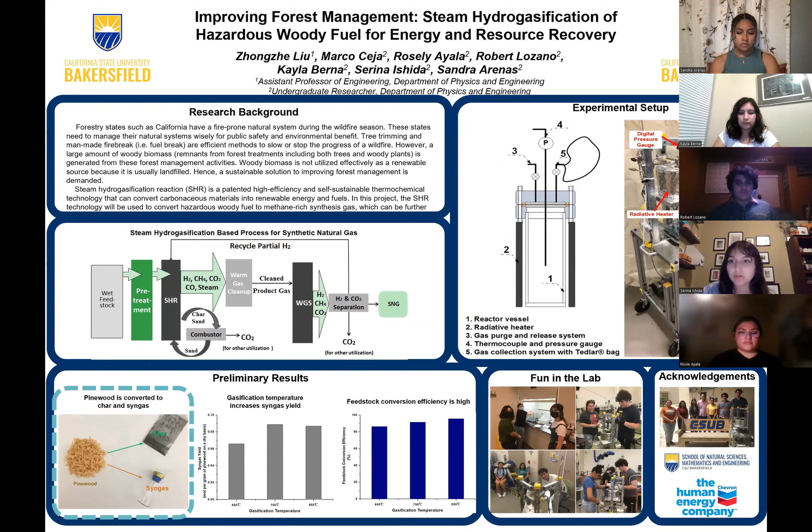For our outline, we have Kayla discussing project background. We have Robert talking about our proposed approach, Marco talking about research objectives and methodology, Sandra discussing results, and Rosie discussing summary.

So for a bit of background, forestry states such as California have a fire-prone natural system during the wildfire season. These states need to manage their natural systems wisely for public safety and environmental benefits. So, for example, according to ca.gov, in 2020, there was a total of a little over 8,000 wildfires just in California, burning about 1.4 million acres. And this mostly is due to climate change being an issue.

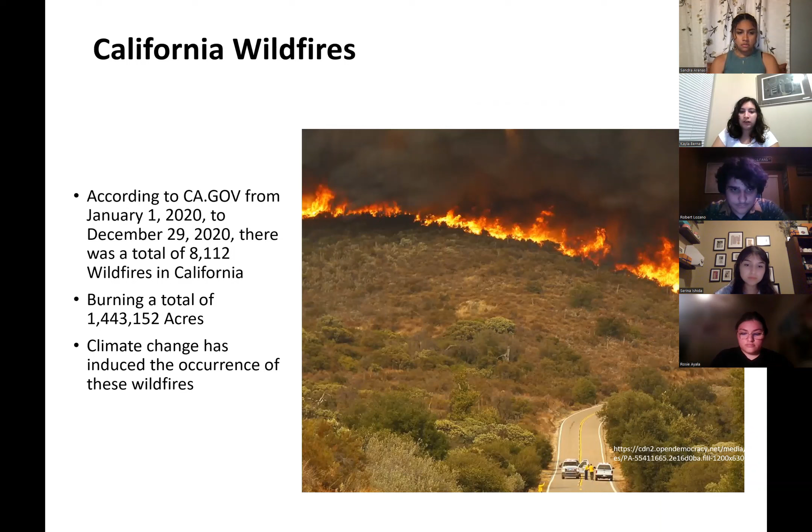A way to manage this is tree trimming and man-made fire breaks, or fire fuel breaks. They are efficient methods to slow or stop the progress of wildfire. Next one, please.

All right. And with the management of the forests and everything, it creates woody biomass. And forest biomass is extremely fire hazardous, and it is generated from forest activities and everything. Woody biomass is not utilized effectively as a renewable source because it's usually in landfills. Hence, this project as a sustainable solution to improving forest management is demanded.

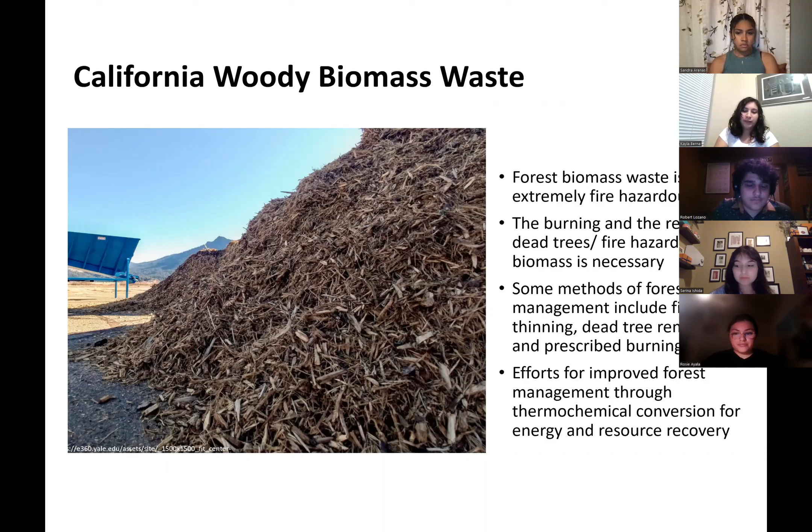Okay, so next will be our proposed approach. Steam hydrogasification reaction, or SHR, is a patented high-efficiency and self-sustainable thermochemical technology that can convert carbonaceous materials into renewable energy and fuels. The SHR process does not need external hydrogen and water supply except for the startup.

So if we look at our diagram, starting with the wet feedstock, which is where we get the leftover biomass from the fires, like all of the wood, it's wet because it's out in nature. We have to pre-treat it, which means we have to dry it out so that we can control the molecular ratios that go into our SHR, our steam hydrogasification reaction.

The Department of Energy's National Energy Technology Laboratory has performed an in-depth techno-economic analysis of the SHR process and confirmed that the SHR process has the potential for 12% higher efficiency at an 18% lower capital cost compared to other state-of-the-art gasification technologies.

So as you can see from the SHR box, the products that we get from the reaction are hydrogen, methane, carbon dioxide, carbon monoxide, and steam, or water. So after we get those product gases, a process called WGS, or water gas shift reaction, occurs, which is where the carbon monoxide and steam react together to create hydrogen and carbon dioxide, which can be separated,

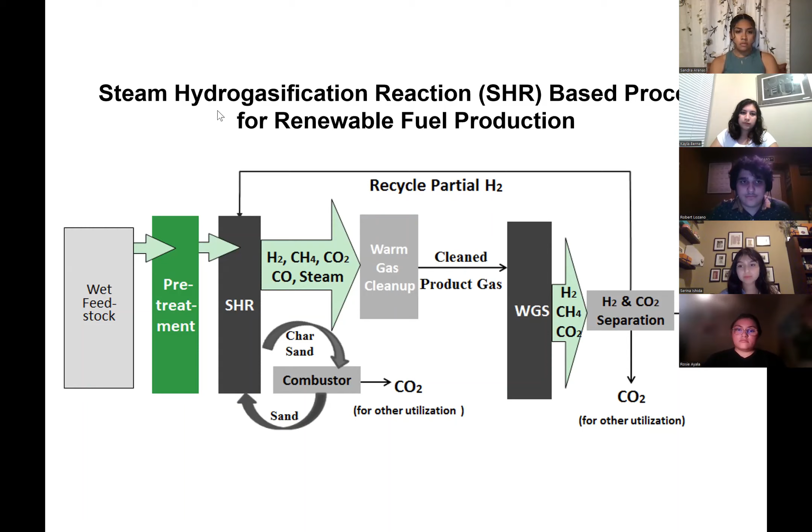All right, this next section is research objectives and methodology. So these are the three major research objectives. The first one would be to determine the syngas yield and the char yield. We don't always get the amount of gas and char we put in, so we want to make sure we know how much we are getting back.

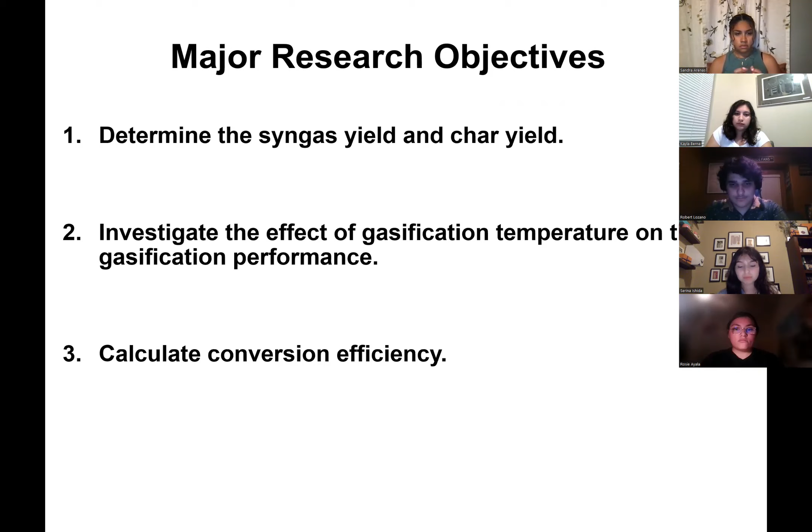Then we will see which temperature is the most effective, and determine if a lower temperature might give us a better performance or a lower performance. And then lastly, we'll calculate the conversion efficiency to see at which temperature is the most efficient and which one would be a better fit for our experiment.

And this is the lab scale gasification system. As we can see, number 1 is the reactor vessel. That's where everything's going to go, from the feedstock to the steam to the hydrogen gas. And then we've got number 2, which is basically the heating element. In our case, it's a coil wrapped in tinfoil.

And then number 3 is the gas purge and release system, which is where the gas is input. Number 4 is our pressure gauge and our temperature gauge. That's going to show us the pressure and the temperature inside of the reactor. Number 5 is the gas collection system. That's where we will insert our Tedlar bag and collect the final product gas.

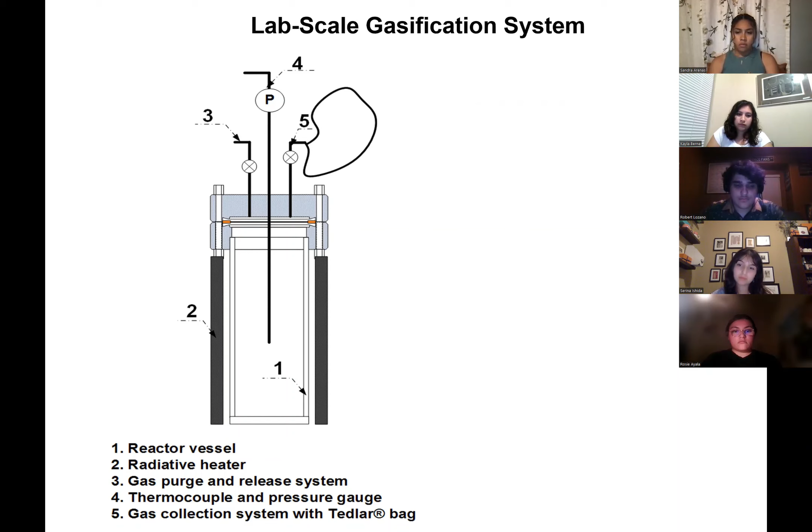And this is an actual picture of what we're actually working with. As you can see, the digital pressure gauge up top gives us the pressure. To the right is the gas collection system. That's where we connect the Tedlar bag to get the final gas, syngas. We have the reactor vessel right below it, number 1, as shown on the left side.

The heater, which is the coils, will be our heating element, and then our temperature control is at the very bottom. We will input the temperature, and that'll heat up the coils, the heating element.

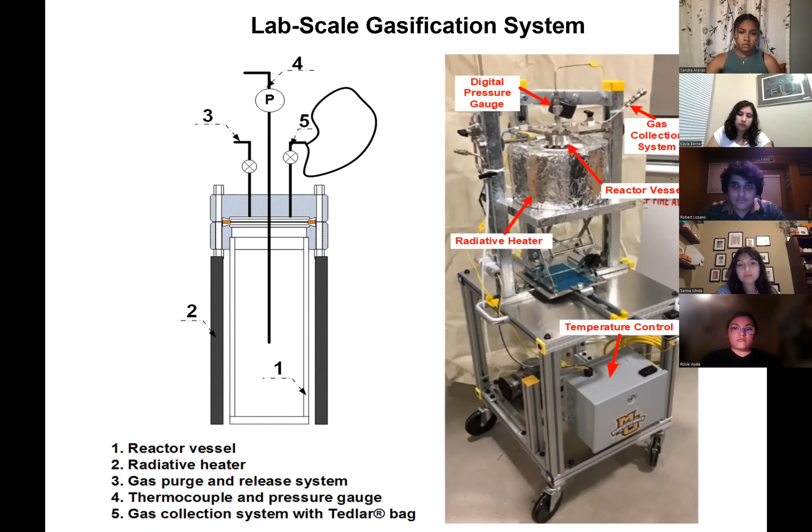Next, we have our results. Here we have a picture of our original woody biomass, which was pine wood, and it was converted into 2 different products. One is our resource recovery, which is char, and the other is our energy recovery, which is syngas. Usually syngas is used for other machines and other products, and char is used as fertilizer.

And then here we have our graph of the syngas yield at the different temperatures we measured. The bottom is our temperatures and the left is our syngas yield in moles per gram of pine wood on a dry basis. So at 650 degrees Celsius, our syngas yield was 0.065. At 750 degrees Celsius it was 0.09, and at 850 it was just below 0.09.

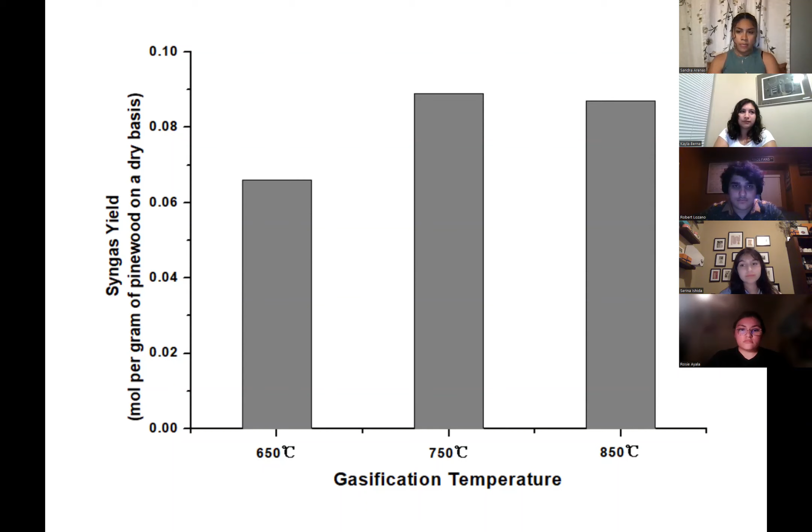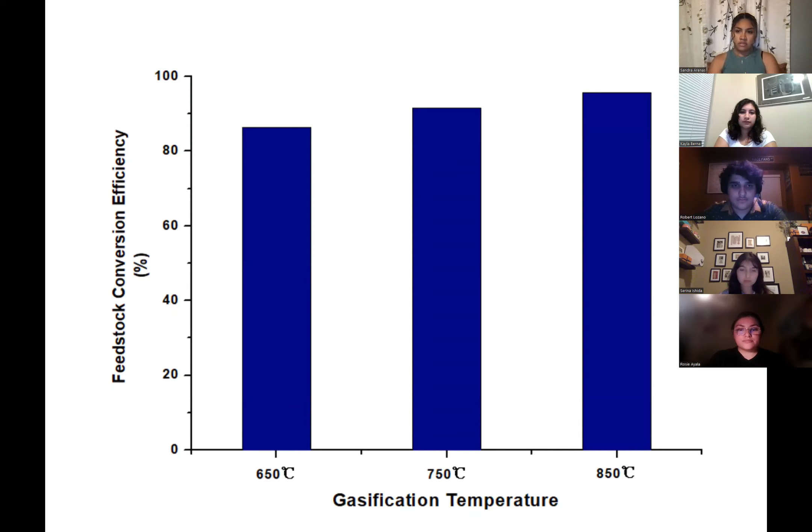And this one is our feedstock conversion efficiency percentage. So for our 3 temperatures, at 650 we had it at about 85%. At 750 degrees, we had it at 90. And at 850 degrees Celsius, we had it at about 95%.

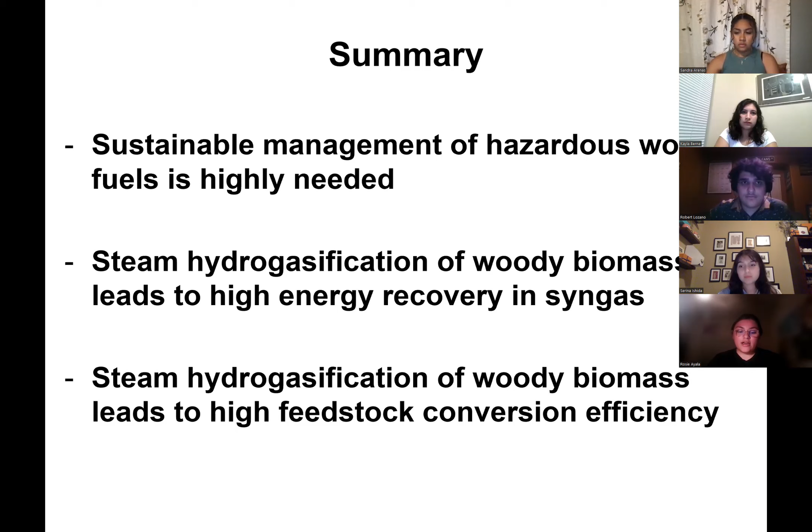So in this presentation, my teammates covered our project, which was about improving forest management through steam hydrogasification of hazardous woody fuel for energy and resource recovery, which came in the form of syngas and biochar. We talked about the need for sustainable management of hazardous woody fuels in order to prevent forest biomass from ending up in landfills. And we were able to conclude through this project that steam hydrogasification of woody biomass leads to high energy recovery of syngas as well as high feedstock conversion efficiency.